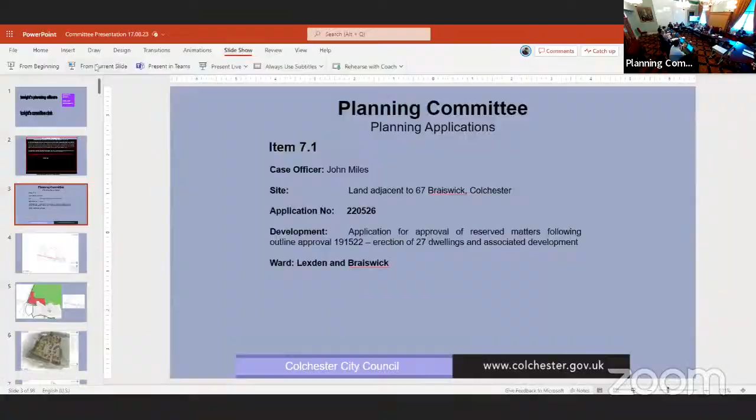Good evening, everyone. So item 7.1 is an application for approval of reserved matters for 27 dwellings at Braiswick, land adjacent to 67 Braiswick.

The site plan is shown here, and the application is before members as it has been called in by Councillor Naylor. The application has been considered by members before at the committee on the 15th of June, where it was deferred with a view to look further at the design and layout, including the location of the children's play area, public open space, connectivity within the site, community space, and whether a reduction in dwelling numbers would enhance the design.

Following the previous deferral, further correspondence has been received from the applicants, which is held on the planning file. This outlines a response to each of the matters raised under the deferral reasons and the applicant's position that they wish for the application to be determined on the basis of the plans which were previously presented to members. The committee report has also been updated and includes a section with additional analysis on the matters raised in the reasons for deferral, found in the committee report between paragraphs 16.59 and 16.75.

While the plans and elevations are the same as previously considered by members at the meeting on 15th of June, I will go through the site history, plans and some site photos again, particularly for the benefit of members who weren't in attendance at that previous committee meeting.

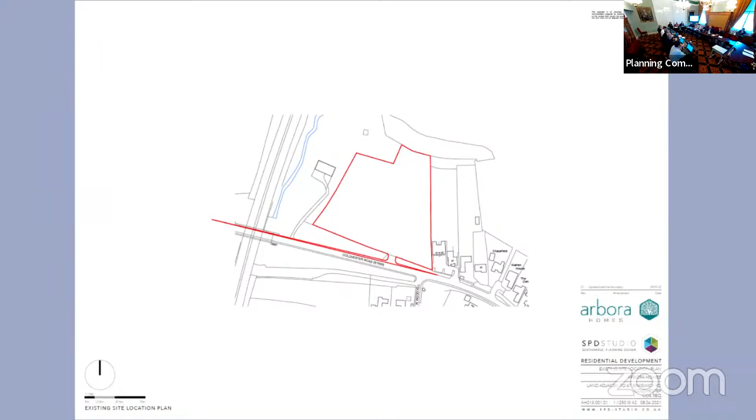The wider allocation site is allocated for up to 70 dwellings, and it's shown in red here on the plan on your left. For reference, the site boundary is shown here in red on the right.

As outlined, the scheme on the part of the larger allocation proposes 27 dwellings with 30% affordable housing. This current application for approval of reserved matters follows the outline permission that was granted on appeal for up to 27 dwellings in October 2020 under application 191522. The current application seeks approval for reserved matters, namely matters of appearance, landscaping, layout and scale.

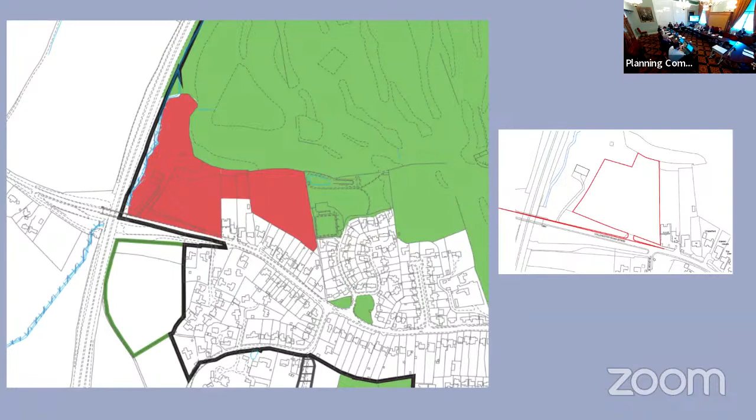I'll now go through some further plans, and as discussed at the previous committee, the scheme has evolved since first submitted following negotiations and in response to comments from both council officers, including the council's urban design officer.

One notable change since first submitted is the revisions to the layout, including to the south of the site, where the dwellings have been reorientated to address Colchester or Braiswick Road, and there's also stepped pedestrian access across the south to improve pedestrian connectivity. The position of the access onto Braiswick Road was established through the outline permission, where access was not reserved, so it was considered at outline stage and has been established through that previous approval.

The access leads into this main access road, which has been designed with a view to eventually serve the remainder of the NC3 allocation, which I showed on that earlier plan there. Off the main access road, there is a shared surface which provides sloped access round to the dwellings to the west, as well as the main strategic area of public open space, which includes a LEAP, so a children's play area.

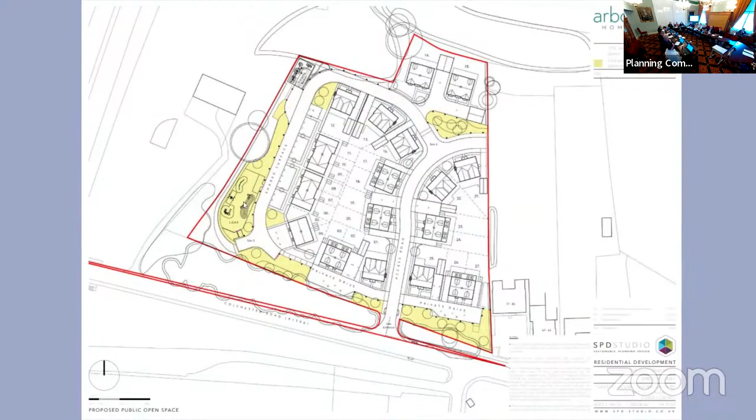Since the application was submitted, as discussed at the previous committee meeting, a number of changes have been made to not just the layout but also the detailed design of the dwellings, including the addition of features with a view to improve visual interest and help contribute to site identity, including but not limited to additional brickwork features, rafters and eaves detailing, and feature bay windows and chimneys.

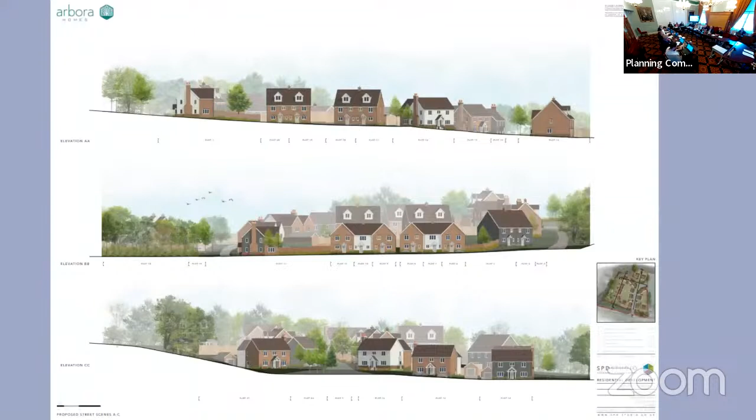The main proposed external materials include red clay tiles, facing brick, and timber cladding, which are considered appropriate for the context. I'll move through some more detailed plans and elevations to give an idea of the dwellings proposed.

The wider house types are a mix of 2 and 2.5 storey dwellings with a mix of 2, 3, 4 and 5 bedrooms. Let's go through the house types.

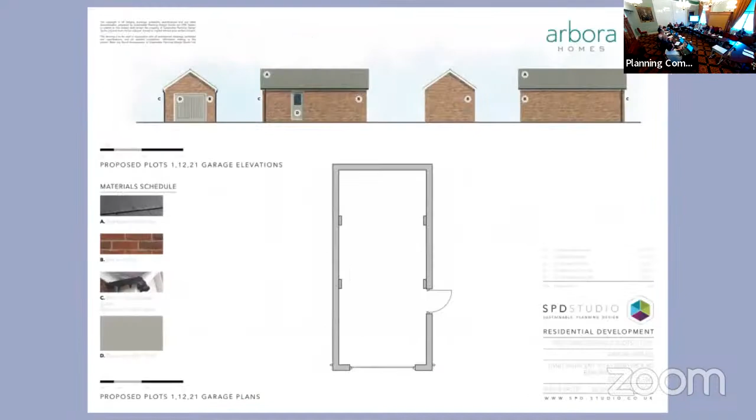This is the proposed garaging to serve the dwellings, which is set back from the respective dwellings' principal elevations in most cases.

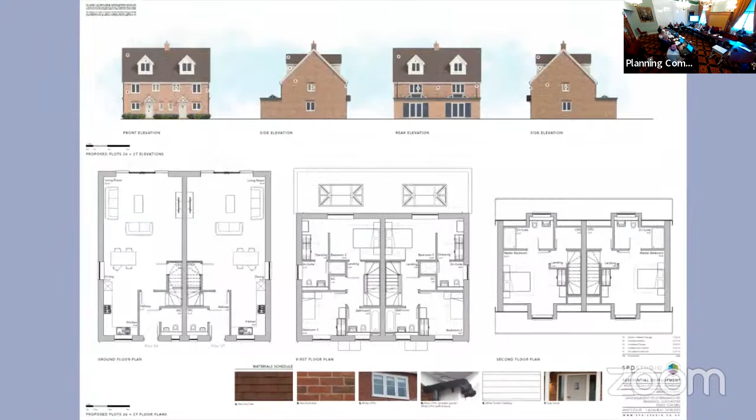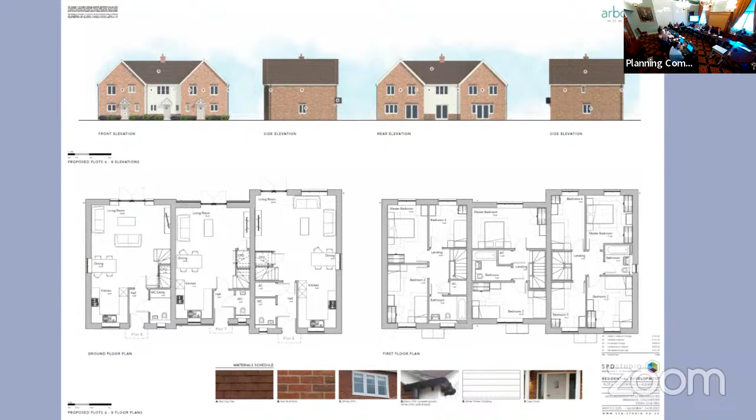Apologies for my mistake, I don't think they are all there. Plots 6 to 8. So bear with me a moment, and I'll have that back for members in a moment. Thank you.

Would we like to continue deliberation, sorry, while I get that up, because that's just on a separate screen. Thank you. Okay, could we move on to Councillor Young then, please? Thank you, Chair.

Yeah, this is interesting, I think it is all about the design, isn't it? I'm glad that Councillor Davidson brought up affordable housing, because let's be honest, we need as much as we can get as soon as we can get it, because there are people living in dreadful accommodation at the moment who desperately need housing, and so this is a positive impact on that.

Looking at paragraph 8.15 from the Urban Design Officer, Councillor Naylor was very clever, and if I was the ward councillor I'd probably have done the same, in just highlighting the negative aspects of what the Urban Design Officer has said. But they've also said however proposed built form broadly complies with policy requirements in terms of form and materiality. Nevertheless, the permeability of the proposal has been increased and improvements have been made to the proposed built environment, increasing its consistency. Additionally, the accessibility and functionality of the public open space has been enhanced. An appropriate level of amenity appears deliverable. So no, it's not a ringing endorsement, but it's not a totally negative assessment by the Urban Design Officer.

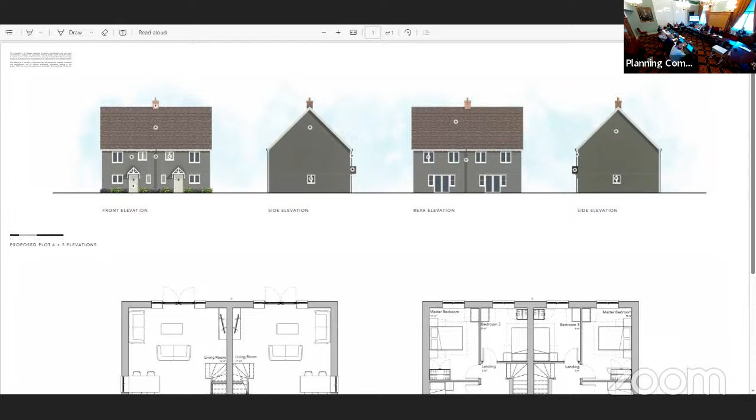So this is plots 4 and 5, which are two of the affordable homes. And I'm sorry, I'll have to stop sharing and share again.

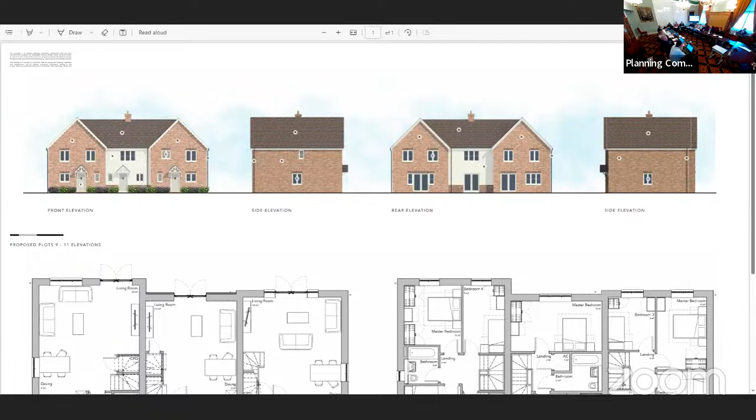And these are the ones specifically that I showed in the presentation just a moment ago. So there's sort of two blocks which would look like that, and then the semi-detached pair which I showed a moment ago.

In terms of the wider issues raised, obviously a topic for significant discussion is the levels and the challenges that the levels present. As put in the report, it's considered that the challenges are symptomatic of the topography of the site, not necessarily related to the density. It is recognised in the report that there is a real need for certainty and security around those levels to ensure an appropriate relationship between properties and amenity spaces.

So there are two conditions recommended within the recommended list of conditions. One requires significant and additional detail on levels to be submitted to ensure those suitable relationships are there - things like sections provided, spot heights - to give us that additional certainty that the relationship between properties and surrounding land and buildings will be satisfactory.

The design quality, as I said, is a balanced judgment. It's recognised that there are some areas where the urban design officer considers the applicants can go further, but there are also a number of aspects, as recognised by the urban design officer, where significant improvements have been made, and the proposals are considered to meet our policy requirements in those terms.

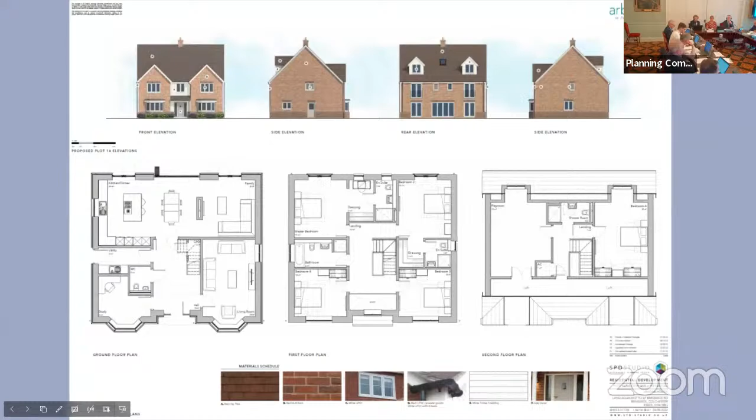Apologies if there's any confusion. As I outlined, the scheme hasn't been revised since it was previously considered by members, but it has been revised since originally submitted. So apologies for any confusion there, but that was over a number of months following feedback from council officers and the urban design officer.

We've had these revisions, and one of the revisions was that there was previously quite a rigid layout where the dwellings didn't front Braeswick Road, and there was no connectivity at the south of the site at all. Through part of those negotiations, these dwellings to the south have been reoriented to achieve an acceptable frontage to Braeswick Road, but it also has the added benefit of additional connectivity across the south of the site, albeit that it is a stepped access.

However, the differences in levels, as outlined in the committee report, do present functional issues, which it is considered would mean a sloped access across the south of the site simply wouldn't be feasible, in that the levels would be too steep to then be usable by, say, a person in a wheelchair.

The sloped access is provided to the play area, albeit a slightly longer route, but what that slightly longer route does mean is that the difficulties and the quite steep nature of the site can be more gradually accommodated, because by travelling a further distance, the gradients can be shallower, providing a gentler slope, which, while longer, is ultimately considered more accessible in the sense that you don't have that steep slope there.

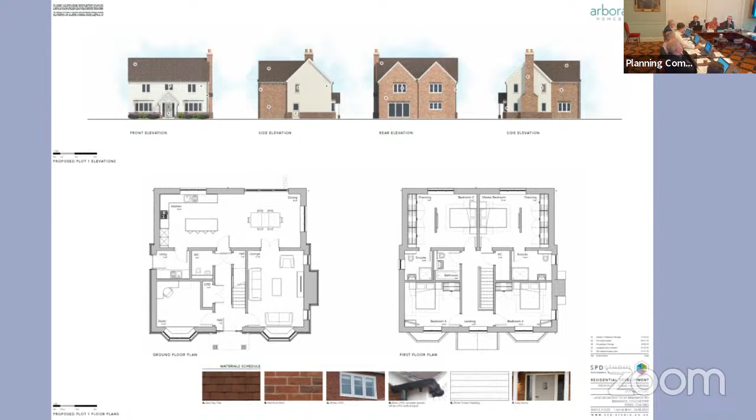Since the application was first submitted, it has been revised with a view to move away from those blank boxes to really deliver some detailed design features and visual interest, contributing to site identity and site character. The character of the wider area is quite mixed, but it is considered that these dwellings won't appear out of context compared to other development in the area. Indeed, they share some features common to properties in the area - especially the frontage dwellings, which are of a scale, massing and form considered to sit comfortably with the surrounding development and house types.

In terms of materiality, the main external materials of red clay tiles, facing brick and timber cladding are also considered appropriate in the context and are in keeping with the materiality of other dwellings and buildings in the area.

On the issue of the play area and its location to the edge of the site, my understanding is that's primarily driven by the levels - that is the area of the site which is the flattest. I think there would be practical issues with locating it towards the middle of the site, as there are some quite significant changes in levels. So there'd be a question - if you were to locate it in the middle of the site, would you end up with a play area that was itself sloped? I think that's one consideration.

In terms of then, we'd look to have dwellings fronting the public open space. If you were to have the public open space in the middle of the site, you would need to likely move some dwellings further west, closer to the road. Then I think there might be more difficulty in terms of levels and how you would accommodate those.

Flooding, I think, was one of the other things, and sustainable urban drainage. That is covered through the outline permission - there is a very detailed sustainable urban drainage scheme condition, which sets things like discharge rates and ensures that there's enough permeable land, so that there's not issues, say, with surface water or increasing flood risk elsewhere.

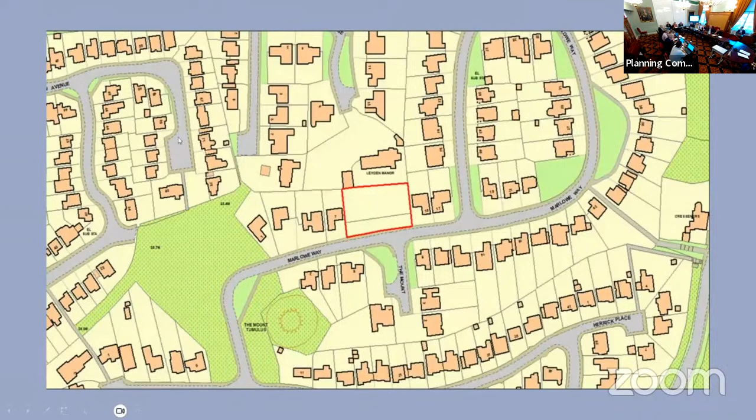So I'll just remind you of the site. There it is outlined in red with the surroundings. This is basically what is now proposed.

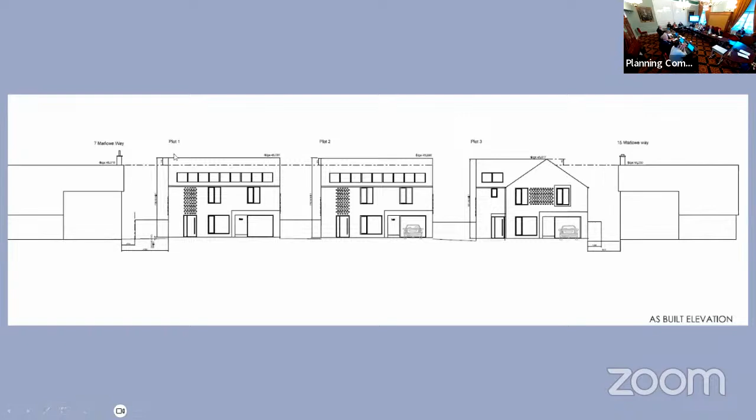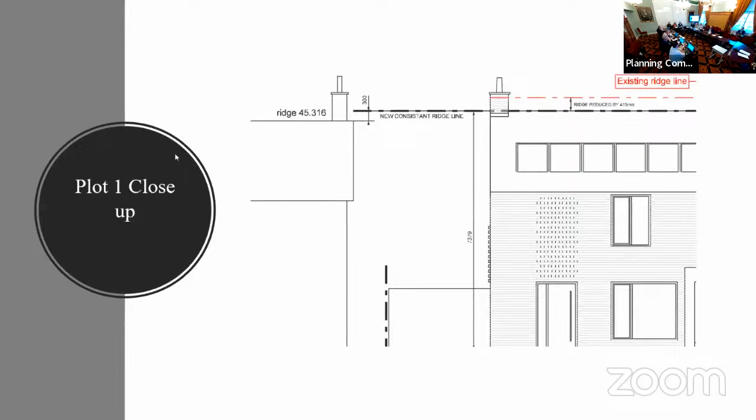This is a close-up view of the changes to plot 1. And the same for plot 2, if we need those later on. And then for plot 3, so the ridge at the back being reduced. This shows the difference between the gable of plot 3 and the neighbouring property.

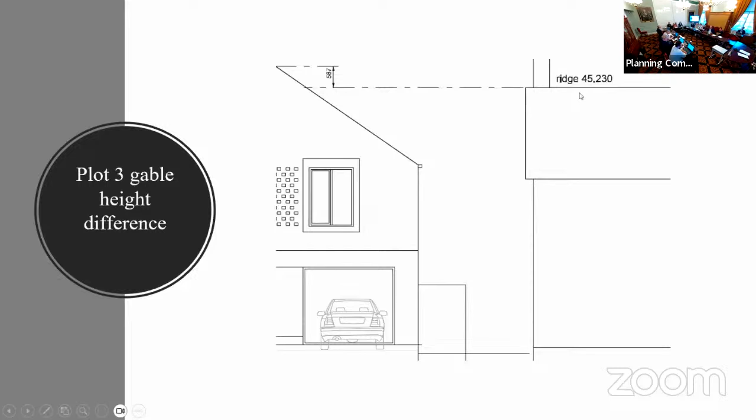And these are the elevations of plot 1, and plot 2, and plot 3. And this is the layout of the proposal.

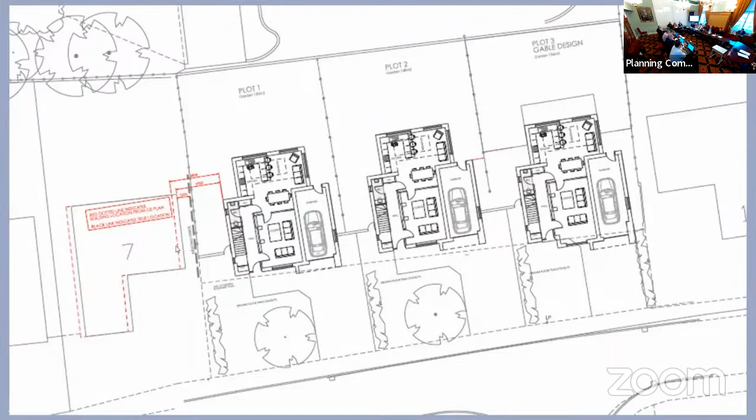Just to remind you that the siting of number 7 was originally shown slightly differently, by about 0.5 of a metre. So it is 0.5 closer than was previously approved. And that's the layout of the scheme.

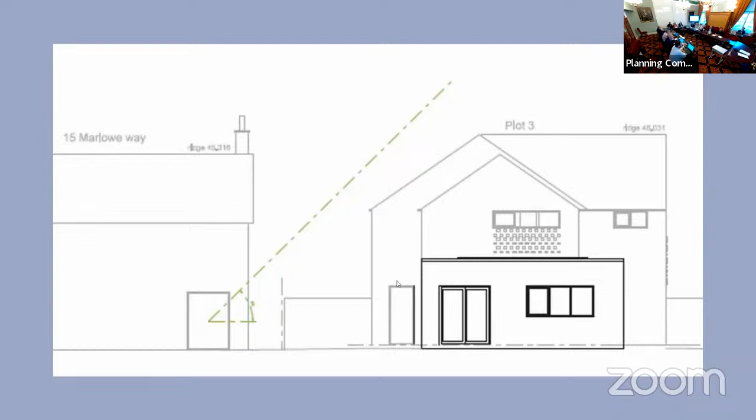This is a drawing showing that the 45-degree rules are not broken in terms of impairment on neighbouring windows, and that also includes from the kitchens which were built larger than as approved as was previously presented.

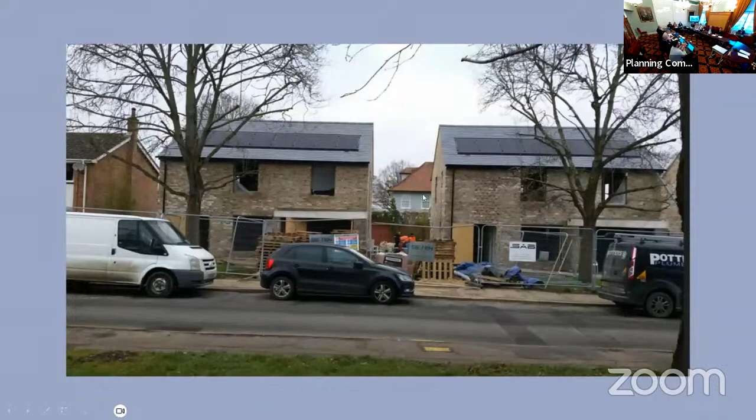And these are photographs of the street scene, which was taken before windows were put in. Just to take you through these as a reminder - that's the gap between the dwellings, you can see the manor house to the rear, glimpses of it, trees retained at the front. There's a gap between the properties at this end of the scheme, which was as approved.

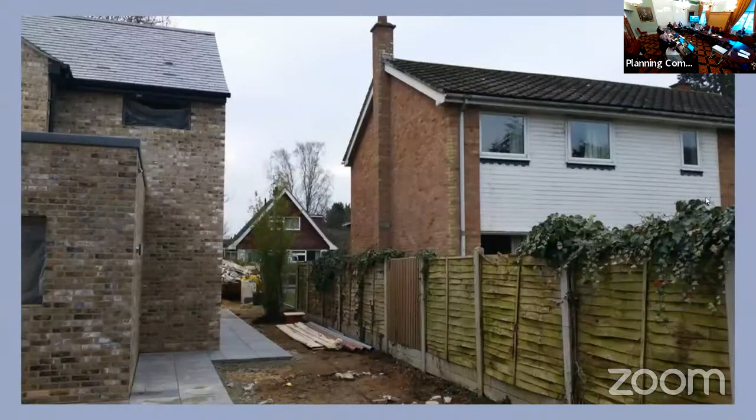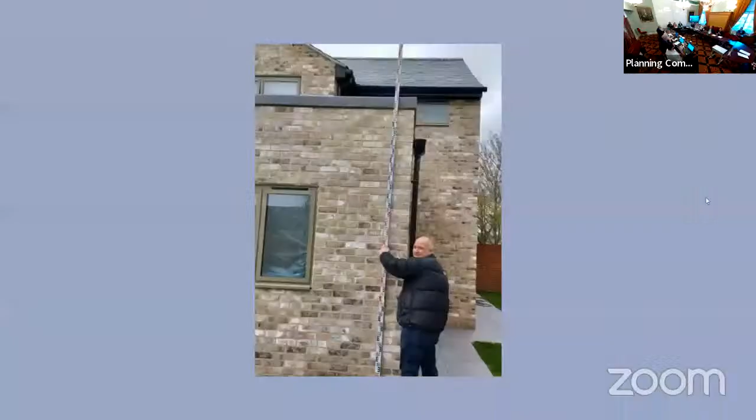That's the rear of the property showing the kitchen, which was higher than was previously agreed. It's a more advanced picture, sent in by one of the neighbours to put on the screen.

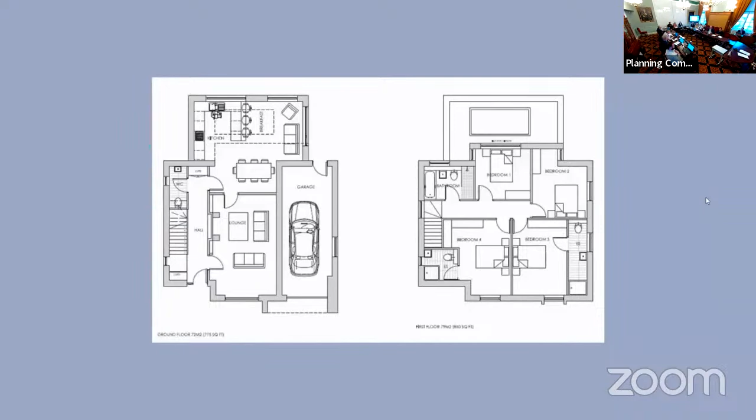I'll just take you back to the scheme now, take you back to the street scene.

In terms of planning considerations, the principle of 3 dwellings has already been previously agreed, so the issues are the differences between this and the approved scheme.

You'll note that the issue arose because the neighbouring dwellings were shown too high on the approved street scene plans. So it's not the fact that the dwellings have been built higher than is approved, it was the fact that the dwellings either end of the site were shown higher than they really are. So it was the relationship to neighbouring properties that differed.

So with the revisions put forward, we consider the relationship of the new dwellings to the neighbouring properties and the overall street scene is satisfactory. It's not unusual to have height variations within street scenes.

These are minimal height variations, as you can see from the street scene drawing. All plots would be lowered and they would visually be acceptable in the officer's opinion. The dwellings would still not appear cramped on site, notwithstanding the slight difference to the relationship between number 7 and plot 1, which was 0.5 compared to what was previously approved.